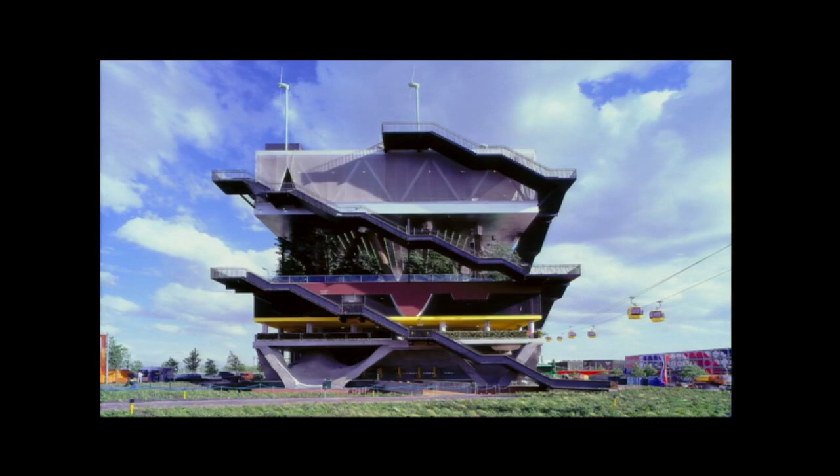So in a way, the dream for the future of how we could see it, not only in Holland, but also in other places, because you see urbanization everywhere. You cannot do something about it, that's there, it's an enormous force, but you can at least try to do it in a certain way that things become a bit better. I think that's the aim we strive for as an architect. It's not like we change the world, but at least you try to do things as good as possible, so that the situation or the general atmosphere in the city, the place you work, improves.

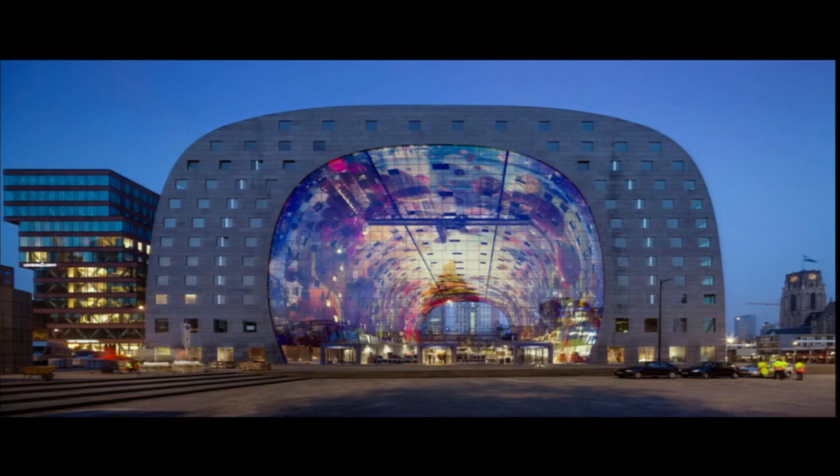Our office is very close to the market hall. After this building was finished, we really had a kind of boost of activity, not only in Holland but also certainly people discovered us. Before, we were considered more or less a boutique office, but after this building we reached a kind of next level.

The more commercial clients came to our door, which is an interesting situation, because how to do the same thing over again or not - this is what we are working on at the moment. So maybe in 5 years you have to ask me back, and I can show you what happened afterwards.

Rotterdam is not a typical Dutch city, it's a more modern city. There's a lot of towers, some old buildings, but the center is completely new, mostly from the 50s. Now more new buildings are coming in, creating a strange combination of architecture. What's nice is the very open atmosphere—people are used to accepting newness. They're ready for experiments and not too critical about keeping the existing, because the existing was already wiped out once, so this was in a way refreshing.

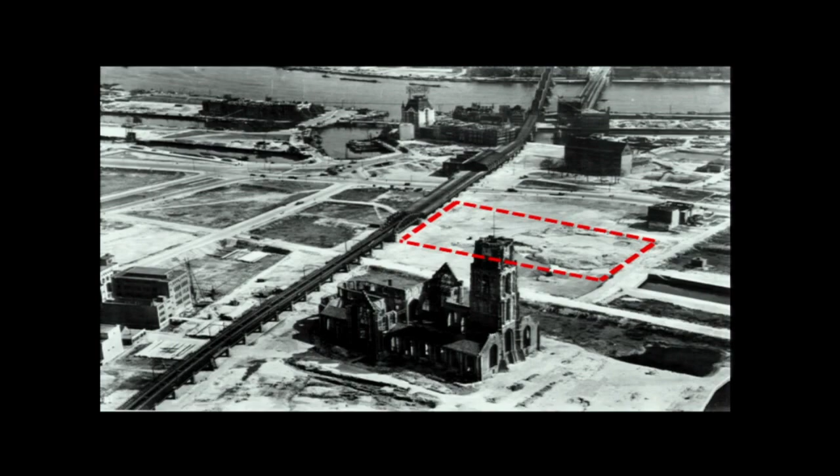This is the plot. The train is now underground, and there's an outdoor market on top of it, twice a week. The new market was supposed to bring more development into this part of the city—an idea from politicians: if we put an additional food market here open 7 days a week, and also add more apartments, this part of the city will benefit, because it had a lot of offices and was quite empty at night. So when we were asked to join this competition, it was a competition between developers.

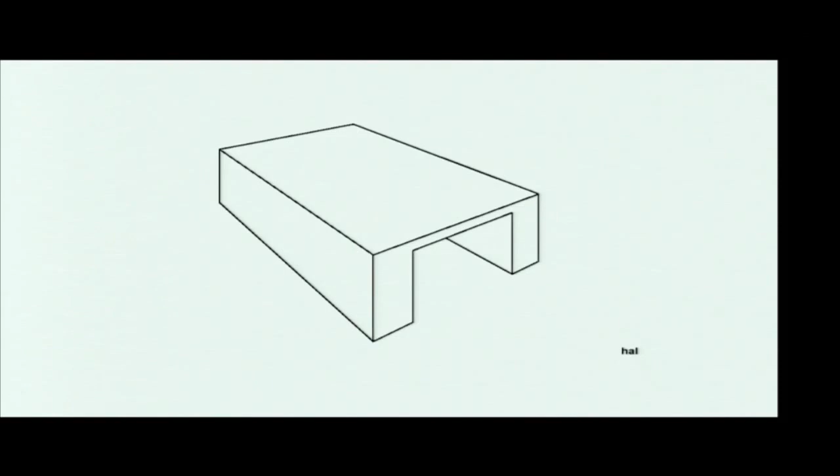We thought it was in a way a bit stupid to just make a slab with apartments and a market in between—that would be one solution. But hey, when we turn it around, we still have the same slab, but we get a huge inside space, and we can make additional square meters on top, which could become the penthouses. This would add extra value for the apartments and extra value for the market because it has more cubic meters.

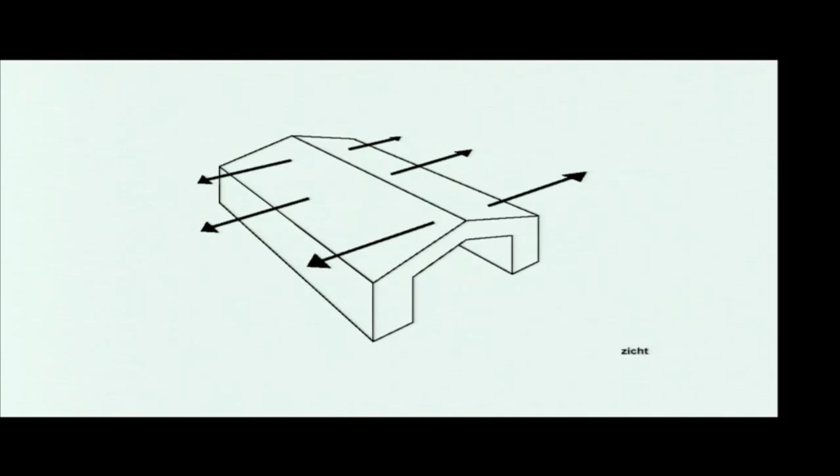Turning it into an arch, with more studies on lifts and everything, and this shape emerged as a horseshoe. It was a very simple, clear story, and everybody said, yeah, great, nice, let's do it—which is a bit of the attitude of Rotterdam. It's like, okay, we all agree it looks a bit strange, but we're going to make it.

It was also built in a straightforward way. In a way it's still a straight slab, except this one is slightly curved, with a bridge on top spanning between the slabs. So it's very simple in a certain way, except the scale is big. What was also very complicated was the underground part, because Holland is very wet, and the building underground is sort of pushing the water up—so it was a complicated situation to build the underground spaces.

When it was done, the inside became a complete magnet, because it was actually designed together with an artist. Everybody knew that when we had this space with the little stalls, this internal facade would be very, very important. But more about that later.

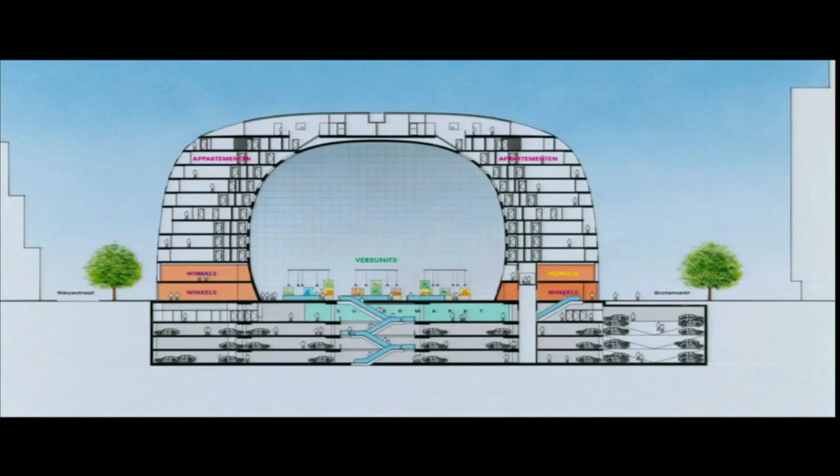The section of the building is like this—you see the ground level, here's a supermarket, the biggest parking in the city inside it, some shops and bars, and these are the apartments, more or less normal apartments. On the top floor you have the last lift stop, and you go in and have your own little patio on top and a large roof deck. That's one section, then it's stretched out to the side.

What we said in the beginning when working on the design was that making apartments on top of a market wouldn't be like a normal apartment—you have normal apartments everywhere. This would be a type that's not standard, maybe a few people in the city who would really like to live there, interested in food. They would be able to get fresh stuff from the market downstairs when cooking, and everybody would be very healthy and cook a lot. Unfortunately, we couldn't.

It's like an aquarium. So you have this additional room in your house, and you can look down into the busy life of the markets. And on the other side, you have a kind of regular balcony and a view to the city. So in a way they're one-sided to the apartments, but they're also two-sided. They have an additional quality on the inside.

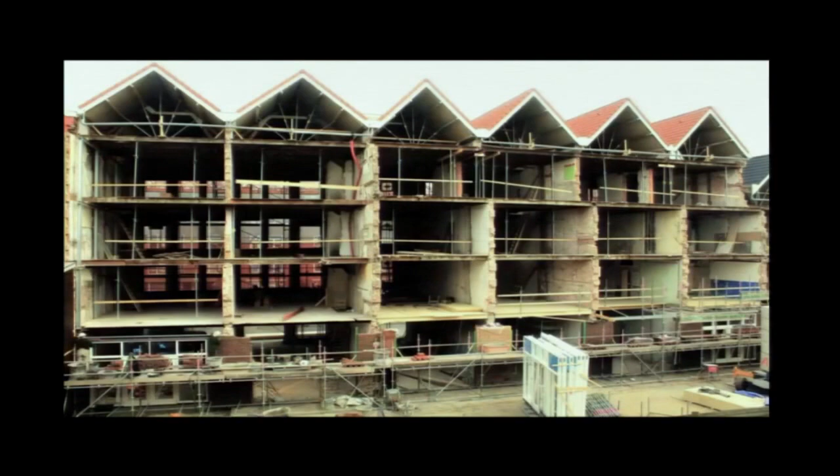A couple of years ago, they did an experiment where people could buy a big empty house, which they had to finish themselves for a small price, with the obligation to live there for at least 5 years. This was attractive for a certain type of people, who were able to buy a house for little money and then transform it to their own personal needs.

At the same time, the collective thing was that together they would do the new roofing and the better foundations. This was done by the general contractor. This type of development, called DIY housing - freely translated by me - is a very successful product.

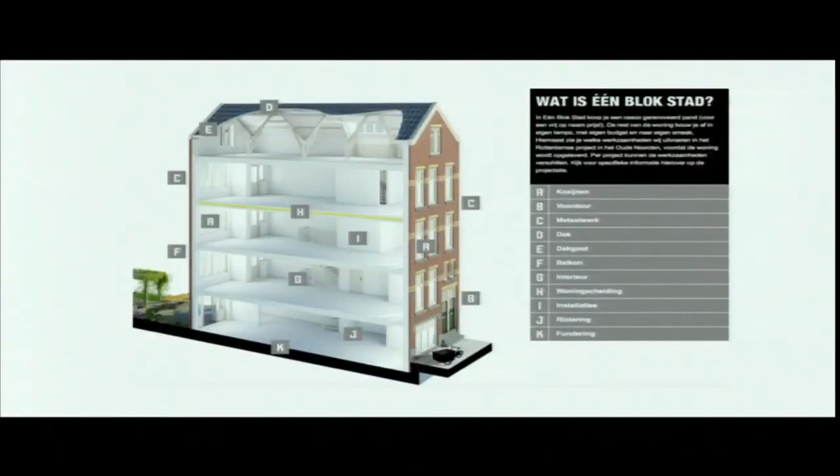It attracted young entrepreneurs and more creative families. They were able to stay in the cities, and blocks were transformed where the existing facade basically remained the same. Sometimes one family has a whole house, sometimes there are two - one has 2 floors, the other has 3 floors - and then there's a collective garden on the inside.

This, together with larger scale development, had a big impact on the social atmosphere of the city, and people felt more positive about their outdoor spaces and neighborhoods. Another favorite of mine is this park, which is on top of a shopping center.

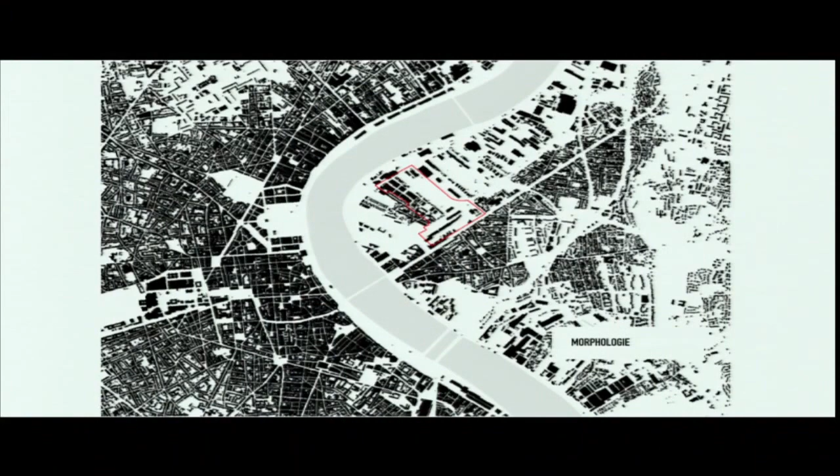I'd like to move from Rotterdam now to some of our projects where similar issues are happening. The first one is an urban design we're doing in Bordeaux, which, like I showed before in Rotterdam, is one of these mixed-use industrial wastelands on a good location. Bordeaux has a beautiful historical center, and right opposite this center is the city. You see this piece of land which used to be mixed use for the army and infrastructure, right opposite the historical center, offering great potential. So the city used to be like this.

You had the Rive Gauche and the Rive Droite, and this was the good side, and that was the bad side. The idea that the city planning office has now is to make this into a more coherent unity, so the two sides are better developed.

If you look at this idea, then this would be the ideal: the same as this one, but on the other side, with a mixed use of activities. There's all kinds of mix of housing, shops, cultural facilities, so that you really have one city. Of course, these days green is an essential issue, same as energy, and the zero energy principle. These are almost no-brainers, so to say.

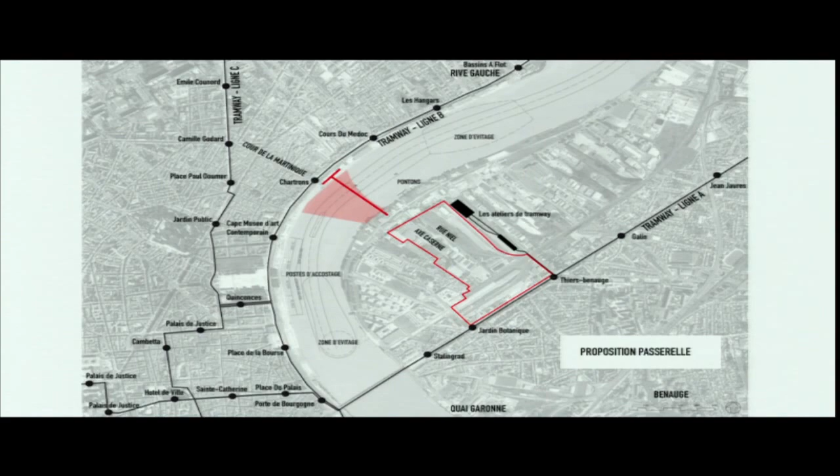So these were the starting points for the developments. There might be a new bridge here, and there's already infrastructure around it, so it's really a good place, so to say. Instead of expanding the city, going inside and intensifying the existing is the way forward.

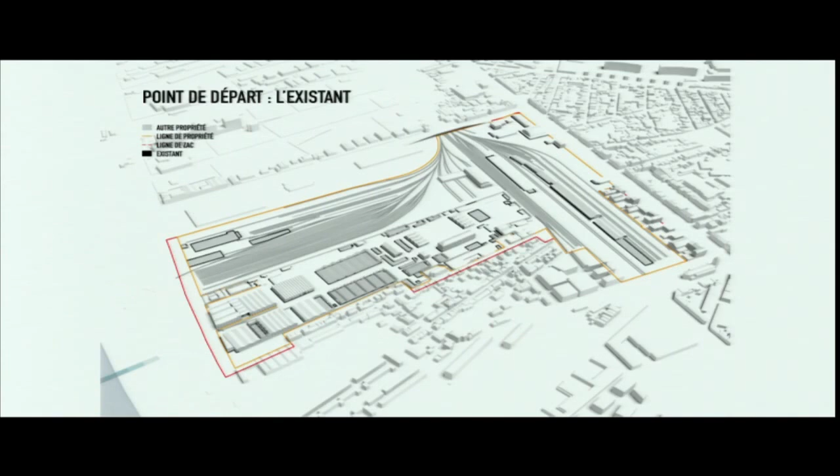What we took as a starting point was to try to keep as much as possible anything that was there, any pattern of the streets, any trace of the train. We thought, let's keep the character there, because when something is there and the presence of the past is somehow visible, it gives a flavor, a certain mood that you can never get when you make a new neighborhood.

So these were the lines and traces that we kept as a base for the design, and then we looked at where we could build. We could build in between these spaces, and you could basically extrude all the plots that we would have. Of course, this was way too many square meters, so we did a few operations to find out what the maximum envelope could be for the new development.

So it was an urban design. The first operation is: let's chop for the light. Let's chop on a 45-degree angle from the streets upwards. Depending on the width of the streets, you make an angle over the volume and slice it off, and this is what you get—a lot of chopped up roofs, you see.

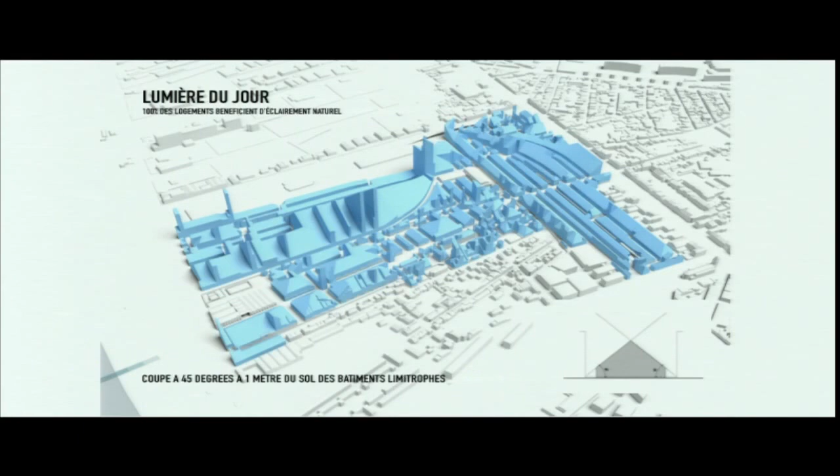Here you see this section, you're walking in the streets, this is the light angle, and on the other side the same thing. On the inside of the block, these are two little houses, and on the inside you can make a big house, so to say.

Then the element of light, of the sun. On certain parts you would like to have sun, and if it's too steep it doesn't really work, so you don't have enough sun. That means these houses would be asymmetrical, the envelope would be asymmetrical, etc.

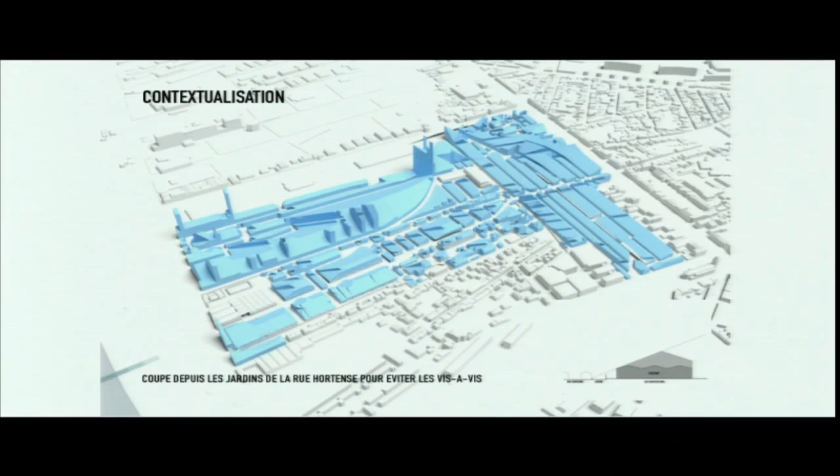So step by step, we got a certain amount of shapes, of volumetric elements that could turn into new developments and new buildings.

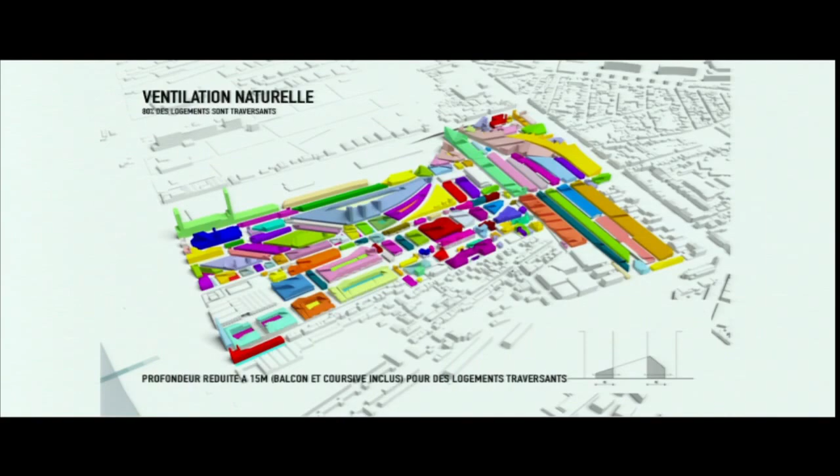Our idea was that this neighborhood was not going to be designed by MVRDV alone, but that we would be able to invite all our friends and some more as well—100 architects, every plot a different architect. There would be elements like ventilation and solar panels; these were all part of the game.

Same for the public spaces and the green. So this was basically the outline for the design, step by step, explained at different scales. We explained, for instance, here in a practical way: hey, you have this existing atmosphere, what do we like to keep?

This we keep, and then we start to extrude the plots, chop it off by the light, chop it off by the sun, add the colors, add pockets of space, add facades and green and solar energy.

So this is then the view you could imagine from the other side of the city, across the river, and the new skyline is in a way a projection from the pattern that's there in the existing area, but invisible at the moment. If you project it upwards with the principle I explained, the facade and the skyline become a very specific skyline defined by the patterns of the past in a way. So that was the principle.

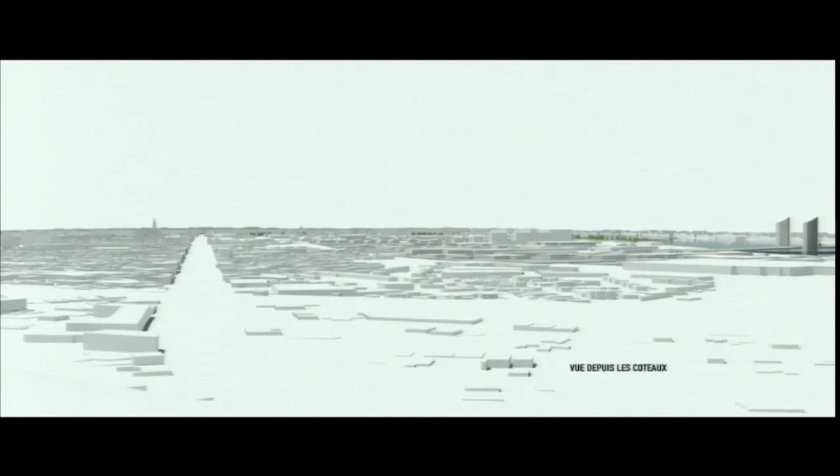Everybody liked it, and now we are developing it in the next step. I'll show you some more timelines in a way.

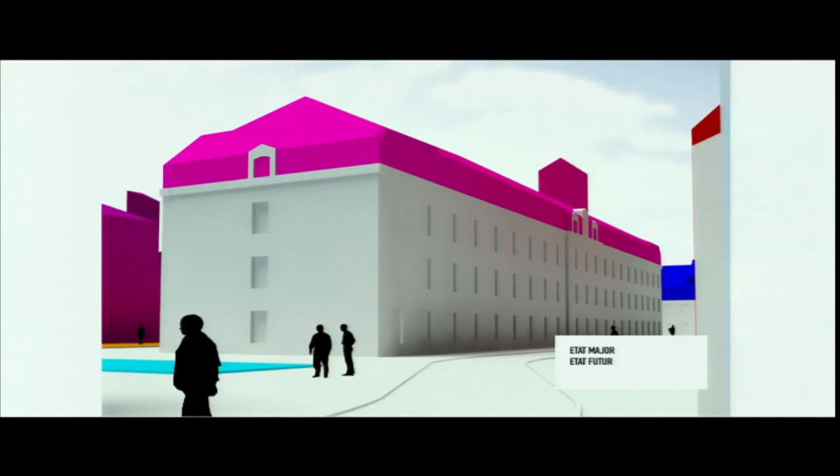By just keeping the facade, it will be a mix of old and new volumes. At the moment we're working on a first phase together with three other architects. We make the first block. This was a second competition right next to our plot, but we used the same principles and designed a series of buildings inside these envelopes.

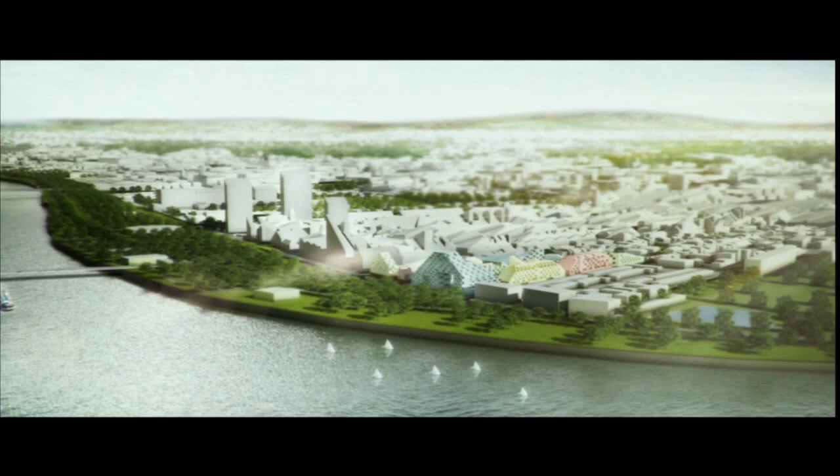It was in a way a test case for ourselves, to see if our own regulations would work. This is the main building that we designed, a series of apartment blocks in all kinds of different typologies, which went on sale last month. This is the model you see when you want to buy an apartment. This one is done by another architect, this one is done by us.

Next is another French project I'd like to show, because it's a building that is so ugly that we were almost doubting if we would do this project. Is this really worth it? But in the end it turned out to be a good exercise. It didn't really matter how ugly the building is — the more ugly, so to say, the more surprise you could create with it.

This is an old mustard factory in Dijon. The building is very new, only five years old when it was already abandoned. So it was structurally okay, but in a way also very depressing. There was, however, a guy who wanted to open a call center in this building because it was located in a good position next to the park and the station.

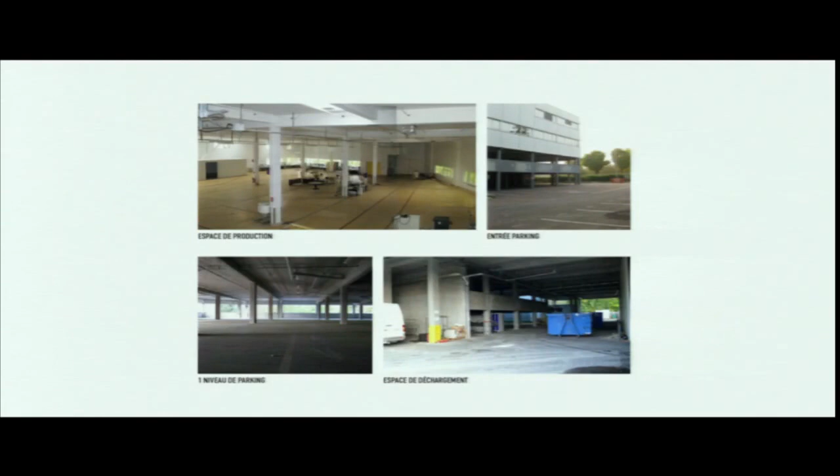On one condition, he said: okay, I would like to buy this building and develop it, but only when I can choose the architect. And his son had studied architecture and said, Dad, you have to call MVRDV. So this guy called us and asked if we wanted this building. That was such a good story that we said, let's do this, even though there was no money and hardly any time.

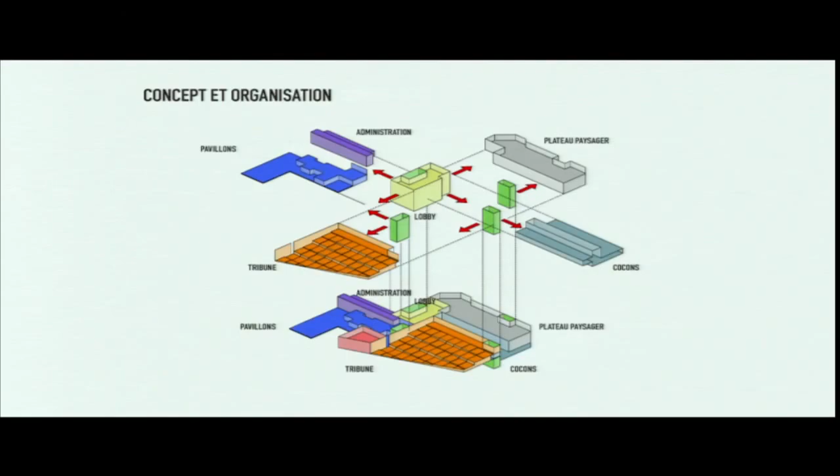So it was a quick study, turning this existing factory into a series of workspaces with different characters. One was a parking space that we turned into an office space. We took away some floors; some we just painted. Others already had an existing ceiling and carpet, and we just took out some panels. Here we did some painting on the walls. We added some small pavilions, and in the largest space we made a big stair and a new window on the outside wall with a view to the park.

So this is totally simple, but then the money was gone, basically — though we still really feel unhappy about the outside. This was the building, how it looked. We only had some money left to buy stickers, so with these stickers we could make a QR code, and the QR code was used by the company, the call center, for advertisements.

You could basically scan the building with your phone and it would take you to their website. It gave them a certain identity, and suddenly the building that was so boring became cool again, just by using a few stickers on the facade. Another lesson: it doesn't really matter how fancy the materials are — you could do this with super simple stuff and a good idea. The most ugly building can become cool.

So that was Dijon — these are a few quick examples. The great part about existing buildings is that it goes very fast. Normally an architectural project like the Markthal took more than ten years, and this was done in 1.5 years, from idea to finishing. A similar, similarly quick project was a building we did in Korea, in Seoul.

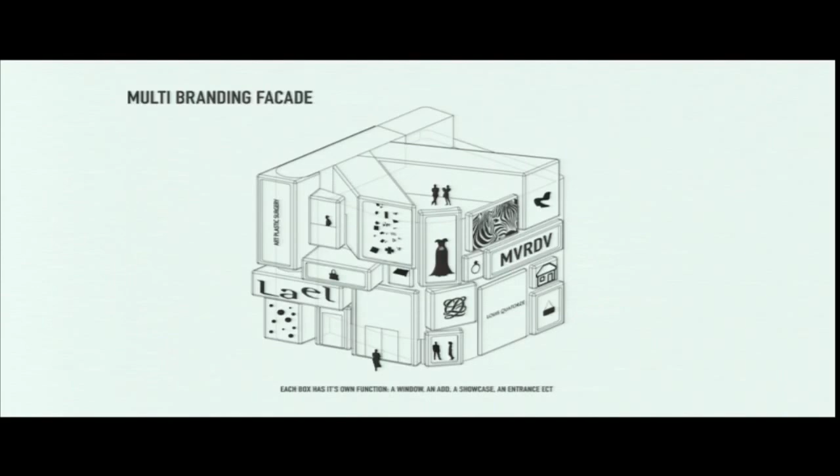Plastic surgery. So in a way we thought that the building was being treated like the people inside - they got a makeover, came out more beautiful than they went in. So we added a new facade with a lot of billboards, so that everybody renting a space could also rent a window, a new window on the outside. Instead of a one-tenant building like the neighbors, it was going to be a multi-tenant building.

So this was the idea: existing and new, dress up - like when you go to a plastic surgeon, you come out with a lot of bandages, and then you have to wait a few weeks, and then you're really beautiful. So this was what happened with the building.

Inside, you still see the old building shimmering through. We only took out the tiles, added steel frames, and clad it with new tile. We added a small pavilion on the roof, and in a small detail, a light fixture around every window which you could turn on at night depending on the mood - blue or this or that, everybody has a different color. That's the story of Gangnam.

One more, going back to Europe - one of the first buildings we transformed was two silos in Denmark, in Copenhagen on the harbor edge. The obvious thing to do was to fill floors inside the silo and make small holes in the facade. If you made big openings, the whole building would collapse, so you could only make small holes - and this was a pity because the views are really nice on that side of the river.

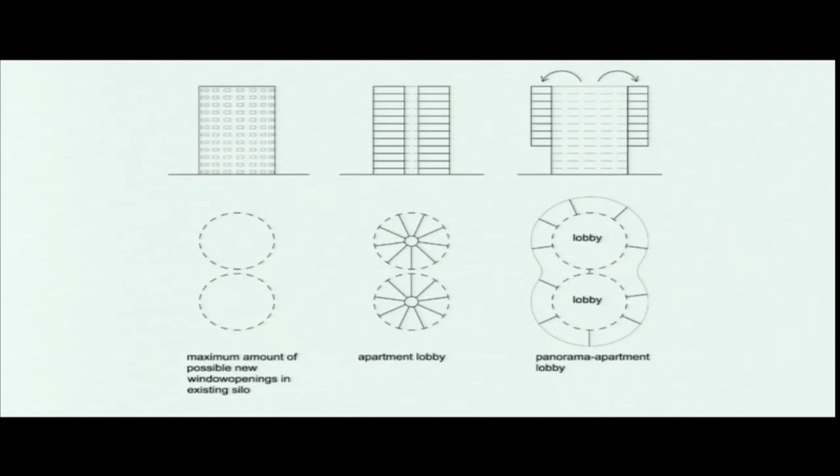So our proposal was to put these square meters on the outside - a bit more per floor, so we needed fewer floors. Every apartment would then have a fantastic panorama window. Everybody understood the principle when we showed the project, except that it was a bit more complicated to build.

The client realized that in the end it would be smart for him to develop it this way, because the square meter price of the finished result would be higher for apartments on the outside than on the inside. So he accepted that it was more complicated, with the bonus of selling it for a better price. Here you see some images of construction.

Big steel beams would cross the existing silo, and on top of them the columns and floors for the outside walls were made, tied back on the inside to the foundations. What was funny was that there was a maximum amount of square meters allowed for this plot. This was all made on the outside, so the inside was empty because it wasn't possible to add square meters there.

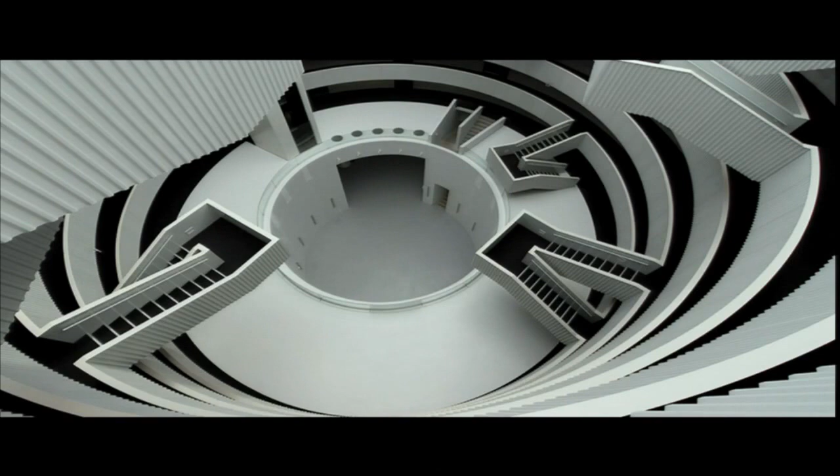We turned it into a gigantic lobby, a kind of architectural bonus space where you enter and have this fantastic collective space before going into your apartment. It's almost like a space odyssey space - everything we added was absorbing material, perforated metal, carpets, to keep the original walls visible on the inside. So inside you still see the concrete wall, and through the concrete wall you enter your apartment. From there, the bonus space is also a gigantic balcony with a full view of the city.

So that was our first Danish project, and after that a lot of Danish interns came to our office, and some of them were really good. One of them started an office in Denmark, and together we worked on a competition for the Rock Museum in Roskilde, Rock Magneten, which is kind of an old factory, a concrete factory that turned into a cultural center.

Roskilde is, maybe you know this, a kind of festival space. Every summer there's one of the biggest rock festivals in Europe taking place in Roskilde. It's already been there for more than 40 years. But the city is so known for that, everybody thinks Roskilde, oh yeah, I have the Roskilde festival.

They thought it would be interesting to have something you can visit throughout the whole year, not only for three weeks in the summer. This location of the factory was between the festival terrain and the center of the city, and it would be a perfect hub where all kinds of activities could take place — new institutions, but also student housing, schools, and a museum for rock, Danish rock music.

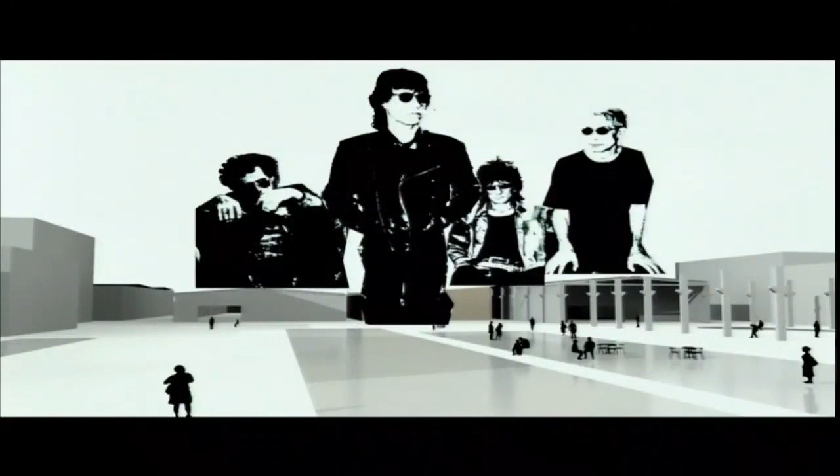There were supposed to be a certain amount of buildings, and we thought every building, every phase, would have its own identity. You could start with the lead singer, and the rock museum would then be, so to say, Mick Jagger, standing in front.

So I brought a small...

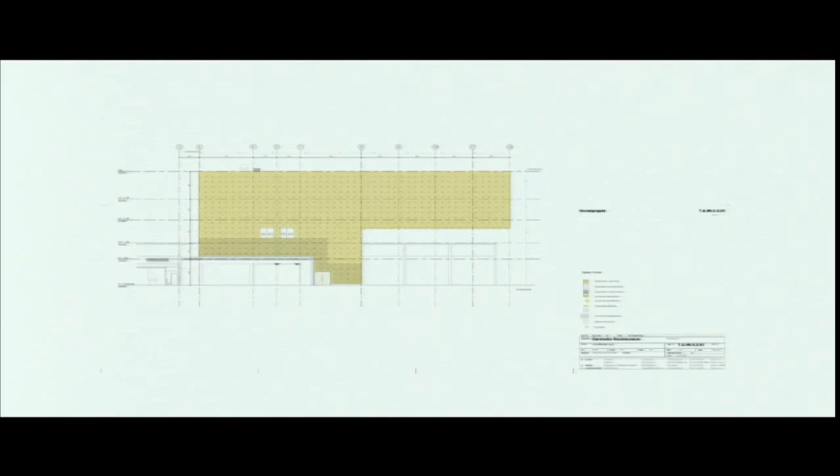This is the new building that we entered, with a big truss connected to a concrete base. The studs were translated into a series of aluminium panels. There were some windows where we added perforated elements that you can see from the inside out, but not from the outside in, while still keeping the overall cladding of the building.

The red carpet was made, and there's an informality that's quite interesting in this front space — it is kept. There will be containers, some stuff added, things coming and going. In the summer there are all kinds of lamps hanging and art installations depending on the situation. So that's the base. For the rest, these halls we kept almost as is, and only changed them on the inside.

This is what you see when you walk out at night, when the lights go on — effects you don't know about from the beginning, like the red carpet reflecting in the ceiling of the golden thing. Yeah, that's like, hey, wow — you only realize it when it's there.

At night, inside there's this red velvet feeling, where we wanted to make this instrumental box that you enter, a completely red velvet space. This was the interior design we made, and there was an issue with fire, of course, since we wanted this to be a soft material.

In the end, we found a special coating that made this look soft, but it's actually still an aluminum panel. Same for the existing hall, where we made the bar with a gigantic concrete counter. So this is a combination of the old and the new.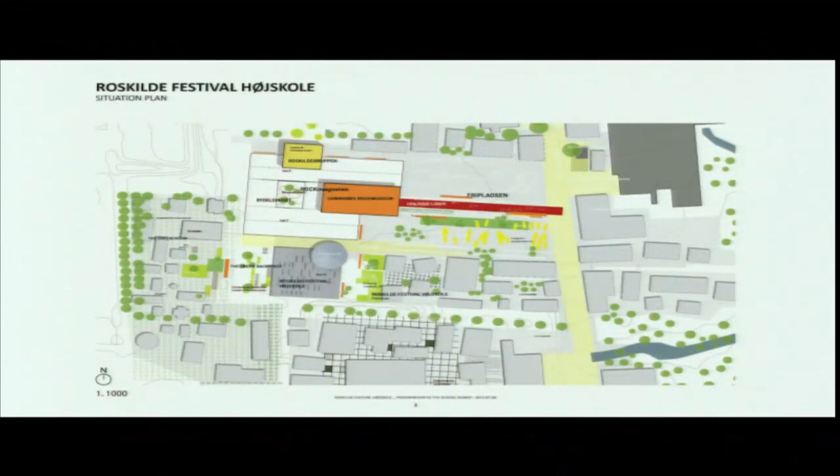At the moment we're working on a second phase, the building next door, which is going to be a school—kind of a high school, not exactly, but between high school and university. People can spend the summer or winter in Roskilde developing their talents, dealing with creatives, thinking, or making stuff. It's more for kids of 17, 18, between university and high school.

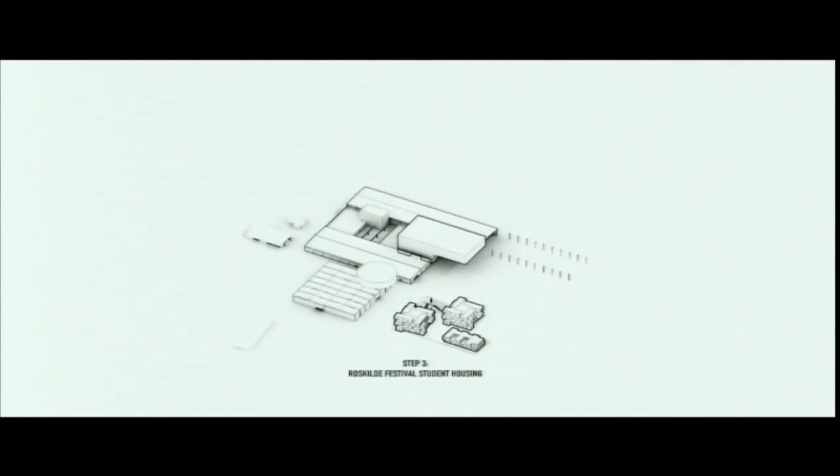This is the principle of the project: the museum is added, the school comes by, and at the moment we also designed a couple of student blocks—student housing for the students who will be in the school. They'll live in this housing next door, and these will be built at the same time.

Quickly an update on this school—it's really an interior project, basically. This is the existing hall and the program inside, so it's a series of boxes, so to say, inside a higher space.

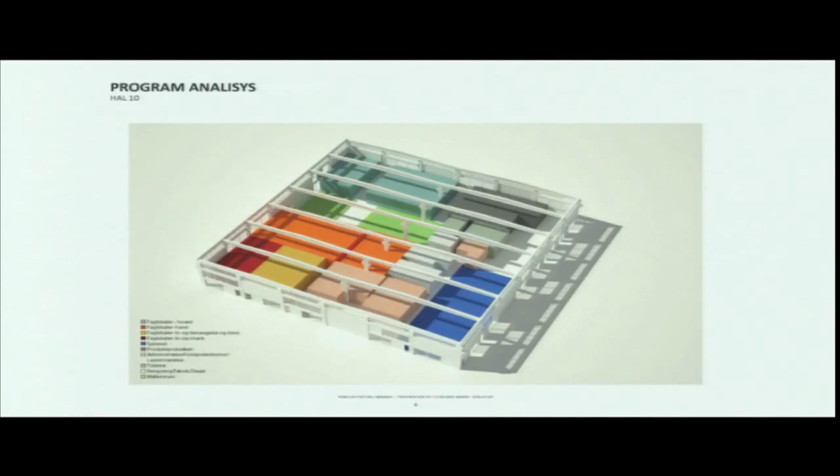That's the building—again, a very ugly building, but by simply adding, in this case, a small lecture space, and brushing off the basic qualities of this hall, we think it can become a really beautiful building.

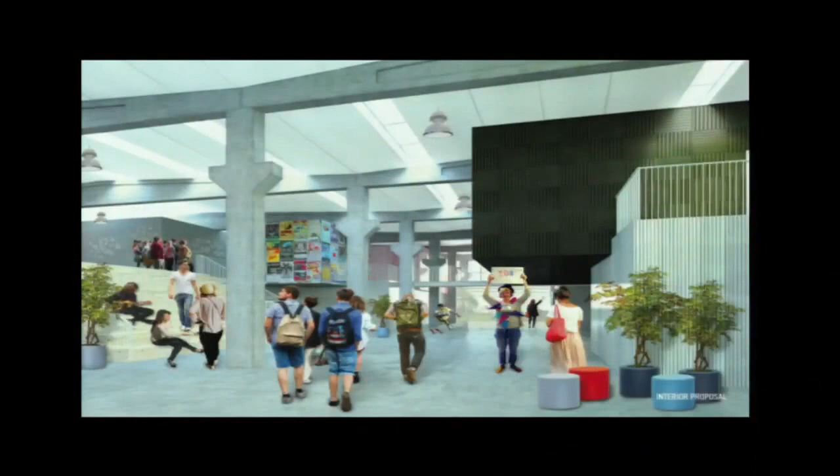Here you see the space inside, because these columns and beams were made in the same factory—this hall was basically produced in the factory next door. So this will still be there, still concrete, and we take away a few elements in the ceiling, add some boxes, and that's the story basically.

Some of these boxes are for working with the hands, others for working with the mind, and working with the body. Basically, this is the concept of the school.

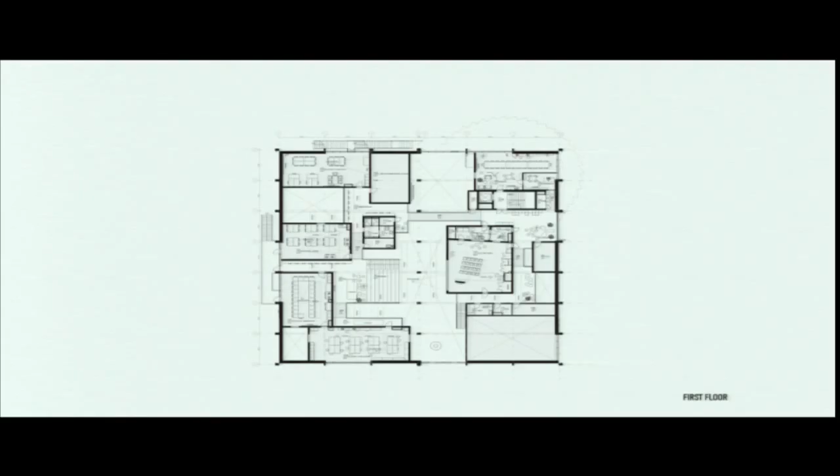So there are activities like dancing, music, creative arts, debate, philosophy, and leadership all taking place there. Then we set up a system to define the ideal solution for the interiors.

We didn't have that much money, so we developed a kind of data sheet for potential qualities of atmosphere of certain materials. Depending on that, we indicated a certain score on atmosphere—how it would be if it's permanent or if you could play with it, like graffiti or a poster wall.

What's the cost? What are the acoustical qualities, etc.? This was all done in a dialogue with the client, in countries like Denmark this kind of user discussion is a really important part of the design phase. So in an interactive design process we reached an agreement that this was the ideal solution, and hopefully next year we'll start construction.

It looks a bit like certain elements we use in our own office as well, so it's not that different from the space we like to work in. It's an existing hall, and then you add a mix of color and material and a certain atmosphere, which is a good base for all kinds of activities.

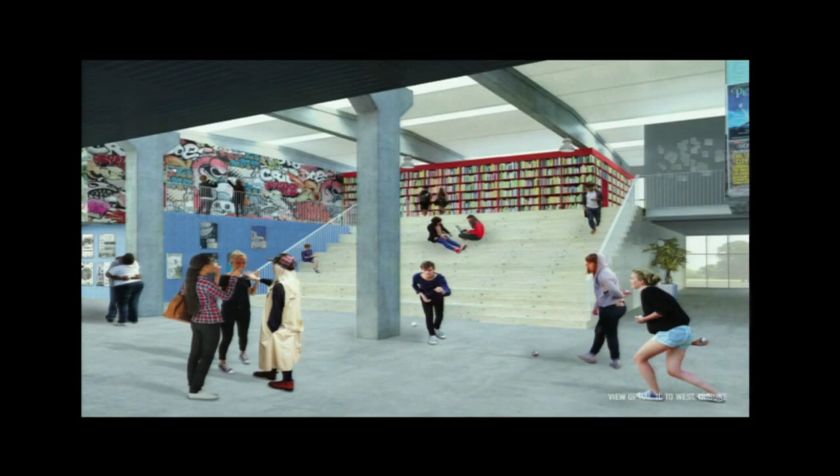Some images there, and one more for the road, so to say.

We moved to Asia, and this is quite an unknown, new project, also a transformation. Sometimes it's really nice to do this kind of modest project, simple in a way, buildings that aren't so fantastically dynamic, but this is quite a cool, typical Hong Kong warehouse.

It was bought by an investor who wants to make an office building out of it. We thought it was actually already quite beautiful as is, because you have this simple structure, and then you have this almost industrial feel to it.

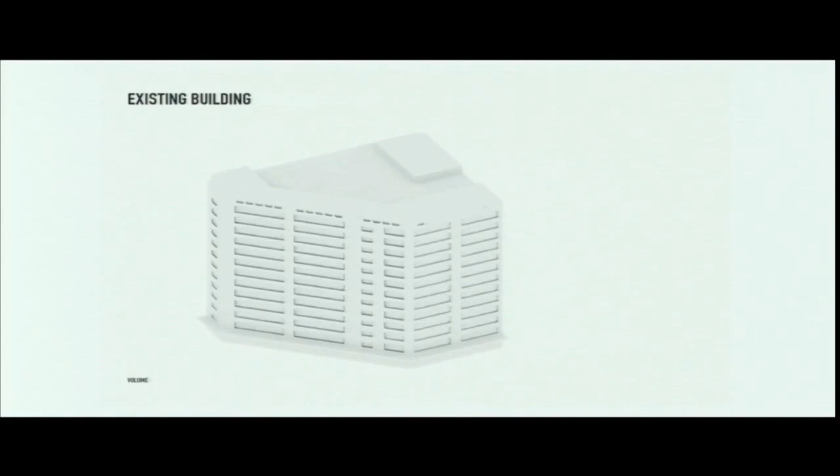Of course it's not handy as an office building, so we said let's just kick out everything that is not structural, so you have a kind of frame, a grid of floors and beams left, and that's the base for the new building.

Then we only add glass windows, also on the inside, so you really see the existing and the new as a contrast to each other. Everything concrete is existing, everything glass is new—clear.

So there's the result, and we added an outdoor space for every floor. It's a kind of lofty office space, and on every floor there's always the potential to step out and look over the city at night. These outdoor spaces give an extra quality.

We made one kind of showroom floor to test the effect of a completely glass office. This is a tenant option—if you rent floors in this building, you can choose if you like it like this, or you could actually get it with glass floors and glass facades, everything glass. That's the difference.

In a way this is one of our topics, a kind of fascination in the office. It's not only color—we also like to deal with the development of new materials, especially glass. We have a couple of buildings made where every time a new invention was made, in a way.

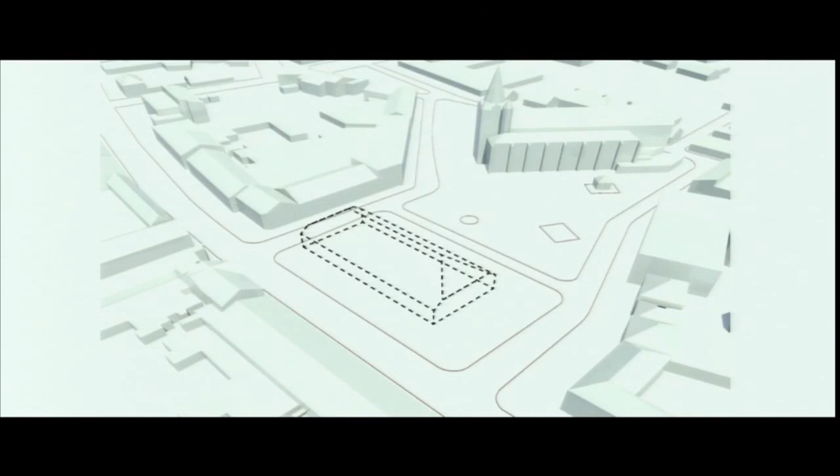After several earlier attempts, an urbanist was hired who was very successful in making a solution—the building envelope that was going to be the base for a new building. We got back into the picture because we'd been involved in this project for a while, but it was never really developing further. At a certain moment it was clear: guys, we have a solution, this is going to be it.

This is the outline of the building, if you can make something inside this volume. Looking at this volume, it was almost too obvious to say, hey guys, if this is what you decided on, what you would really like is this - it has the shape of a typical farm from the village. So the average conclusion was, let's make a farm.

So we said, let's do it then. Let's make a farm together. So the thing is, which farm? It became a nice research project together with the architectural history department of the Eindhoven school.

An inventory was made of all the farms of the village, and they were indeed pretty much the same, but slightly different as well. A database was made to map all of them - how long are they, where are the doors, how many chimneys, what are the proportions, on which side is the entrance, etc. We put all this information in and tried to develop the average out of it, to make one farm that is kind of the average of all the farms in the village.

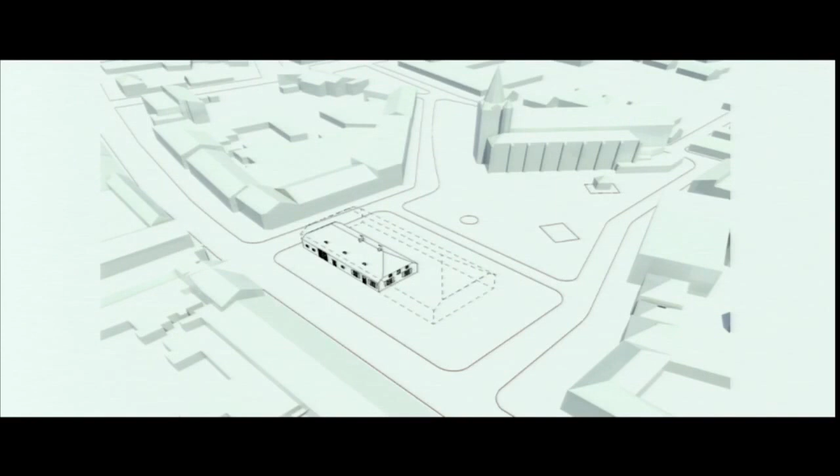So what to do? Luckily it was a digital file, so we could introduce scale. We stretched the farm to the right proportion, 1.65 times bigger. And then it became a fantastic solution to say, look, we don't have to make this really out of brick - we can make it like a Photoshop building. There was a new technology where you could print on glass, and this more or less happened at the same time we were working on this building.

After some research, it became possible that we could use this product. And then the architecture of the building became really a digital project, where we could erase some of the facades where we wanted to have a view, because the building was scaled 1.65 - but the people are not scaled 1.65, so if you stood in front of the window it would be much too high.

So the client, who was a commercial developer, wanted some shops and little bars. He said, look, I need a shop window, please make a window. So we just erased some of the pattern and gave him a shop window, but kept everything else.

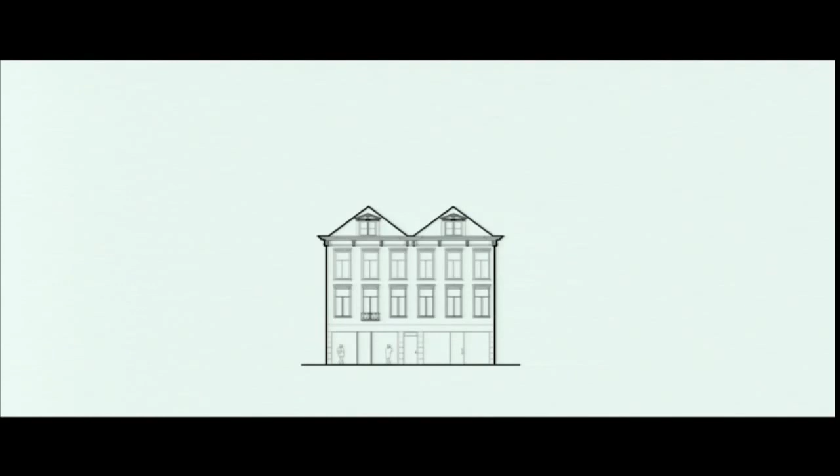This is the original design of the house that was there when it was built. Then the fashion shops came and they chopped off the ground level, and this was more or less empty. The building had potential to add some extra square meters, as long as you kept some sort of traditional outline, a permit was allowed.

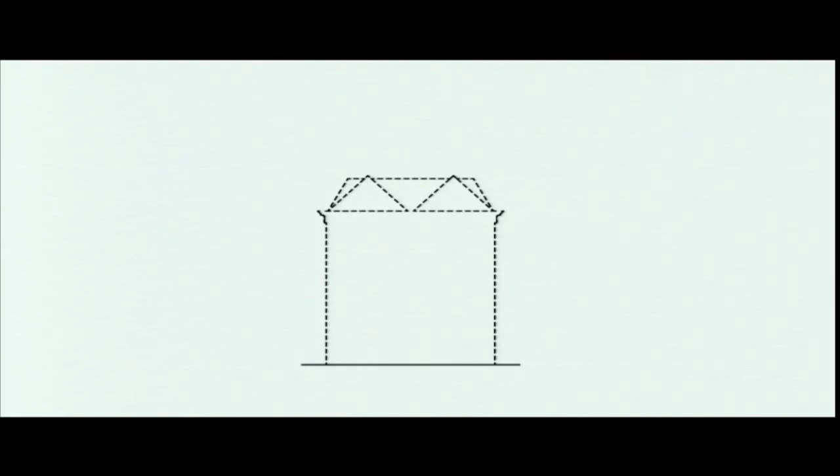This is then the existing house, and what we said was, okay, why don't you just, instead of designing it new, take the old design and then stretch it out again, make it fit to the new building envelope. So we took the old drawings from the archive from the city. This is the original design from 1874, and two of these houses were bought by our client.

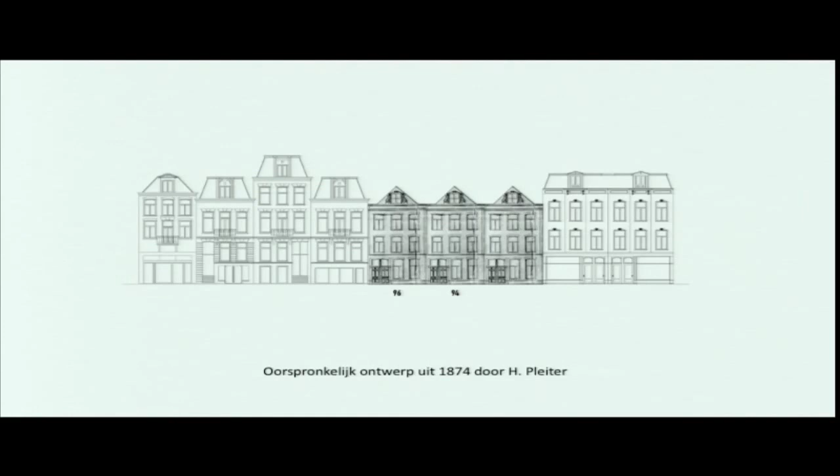So then we said, okay, why don't we do it like this? Keep the old design, copy it, but where's the shop? You have to make it out of glass. If you have your traditional design, you keep that design, but make it completely transparent. You have a fantastic shop, and at night it will be the bomb, the best building on the street.

There was a bit of discussion about it, because how is that technically and aesthetically working? The city said, okay, traditional is like this, and a completely glass building won't fly, so to say. We have apartments over there, and energy-wise it's going to be a nightmare. This is not going to work. So we had to make a new deal out of it.

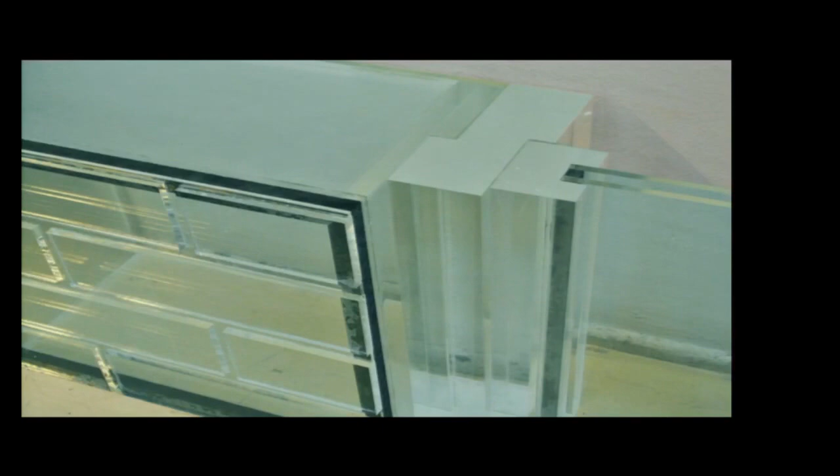Maybe we were ignorant because we didn't really know if it would work. But we just said, okay, if it doesn't work, we could do it like plexiglass, and this was the first test. And then we could make the rest also out of glass and make the windows out of plexiglass. And then we discovered this Italian brick, this piece of glass from Murano, which was insanely beautiful.

And when we had ordered a few of them, the effect was so amazing. They said, oh, this we have to test if this works. So can't we make the whole building using glass bricks from Italy?

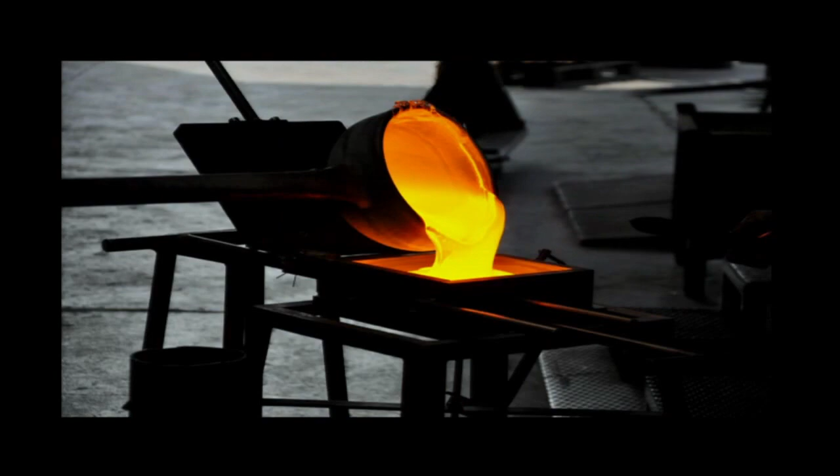The guys from Murano said, well, yeah, we cannot only make bricks, we can also help you with the other parts. So the glass window frames out of plexiglass, we can also make them out of glass, no problem. So step by step, everybody got more and more excited.

There was, of course, an issue of money, but when it's very beautiful, it helps, so to say. So our client got more and more excited, his business partner more and more worried. But in the end, the ultimate solution was like, okay, this is not architecture anymore, it's art. And then everybody said, yeah, it's actually not so expensive anymore. So it's a good advice: if you're over budget, say it's art.

Now, in the meantime, in Italy, they did a fantastic job. Basically, every piece of the building was made into glass. There were different sizes of bricks, different decorative elements. The only main issue was how does it stick together?

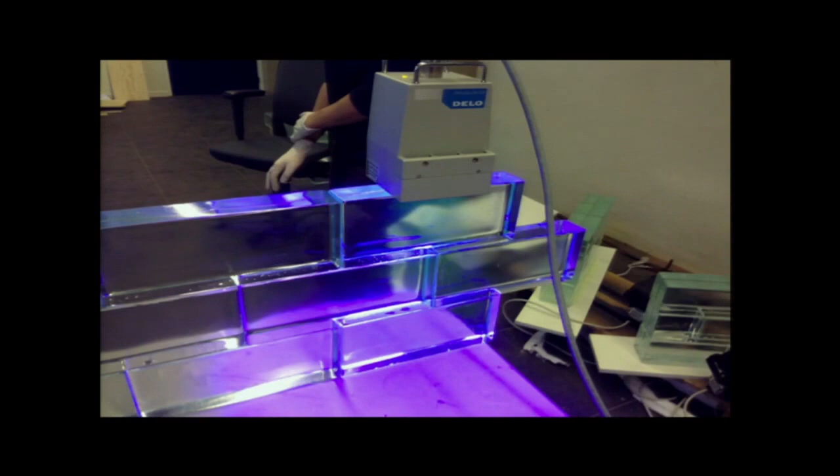Because you can put them on top of each other, but then it starts to slide. The glass element in itself is very strong, but if you put them together, the weak spot is obviously in the glue. So together with the university in Delft, research was done on how can you -- there's all kind of fantastic glues already made, and you have to think about the dentist, for instance, you get this kind of blue light sometimes, and within 2 seconds it's done, it's dried and it's really strong.

So this same two components with UV lights, all kind of new materials that are extremely super strength. So together with the Department of Materials in the university, we made a test of the bricks, glued them together, and like magic, it would hold. This is quite heavy, and the glue kept everything together.

A more complicated element, like the architrave over the windows, was all built in pieces in Italy, came over with a truck, and then it puzzled together in Amsterdam. And we first did a test in the university again, how strong this would be, because on top of this there would be this heavy amount of glass bricks. And let's see if this would, oh, sorry.

Oh yeah, okay, click. So this is a kind of structural movie made by the people in Delft.

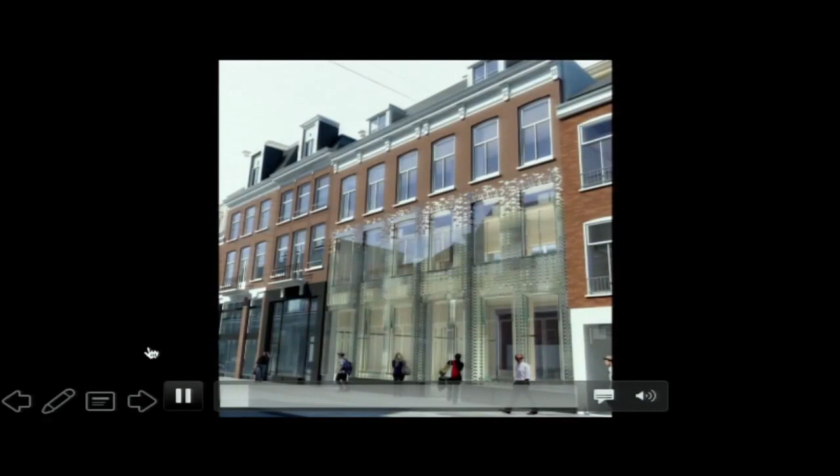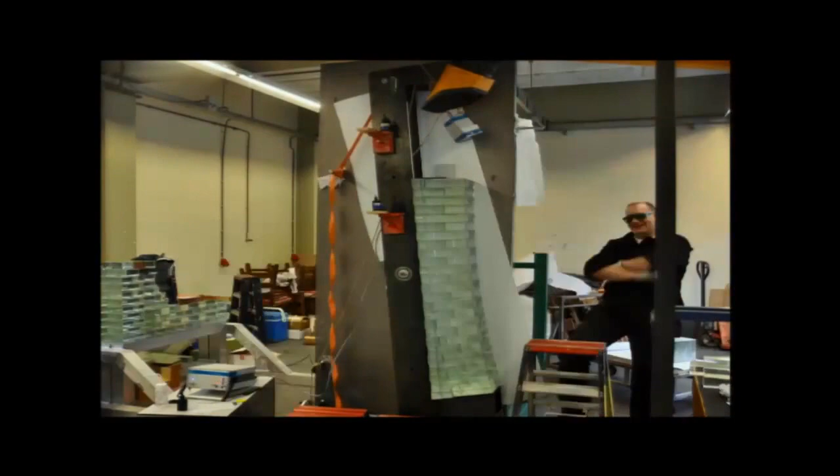They were testing the strength of one of the architraves. The complication was that it had to be built horizontally, so every brick had to be glued horizontally. So they made a device that would rotate, and every time they would use the UV lights, glue, switch it again, glue. You can see that every time the glue was applied, it had to be horizontal.

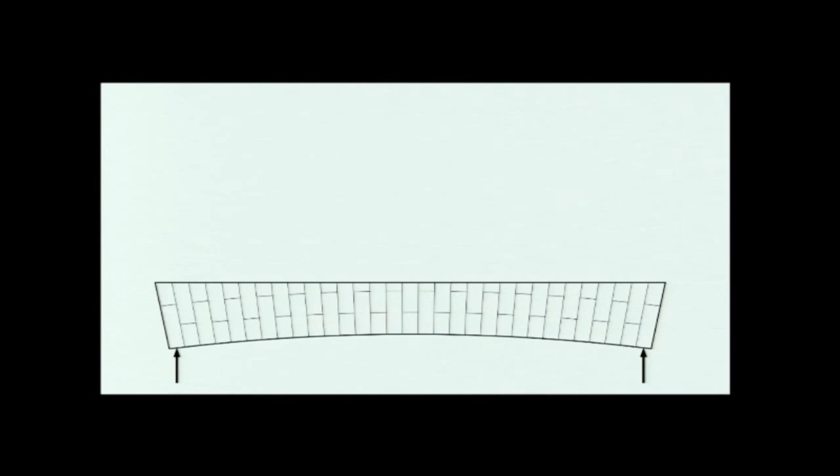Hoist it up, and then put it onto points, and then put the pressure on. Measure how much strength it could hold before it would break.

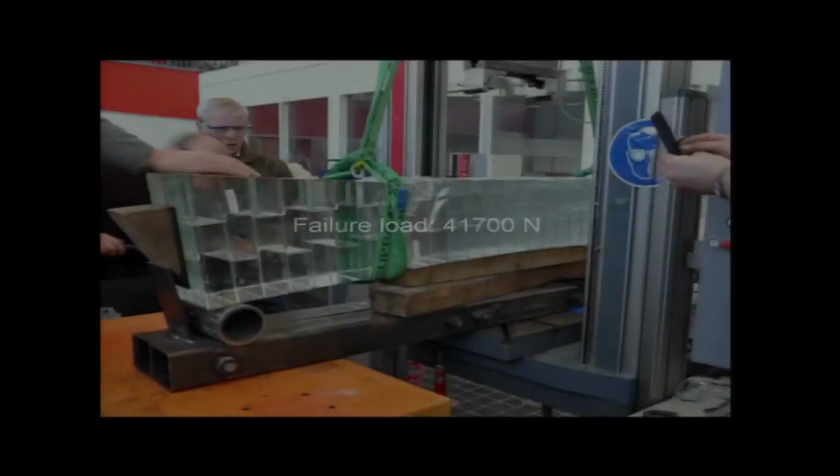Well, the good result was that it was more than enough to support the layers of glass on top of it. Of course, this was a crucial element for getting the building permit, because it's nice to make this idea.

Then there was actually a lot more work in the technical development. Because the drawing itself was already there, they just extruded it, we just changed the color, and then these kinds of elements would support this part, plus there was actually a steel element in between, so the brick was supported by a steel beam hidden in here, but all this part had to be supported over there and over there.

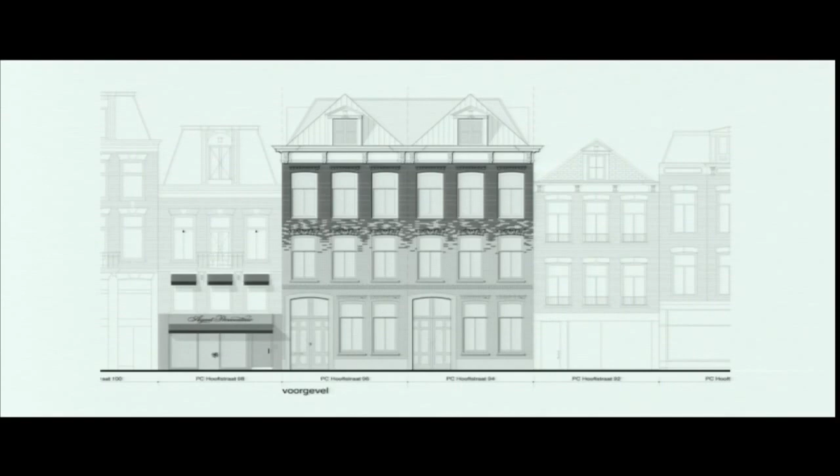So in the meantime, the building was gone. That was not so much of a problem. They started to build the housing on top.

And in the meantime, the glass bit, we didn't have it, it took a bit longer, so to say. So this was empty for a while, and then the glass came, and the guys from the material department said, yes, you can build here, but you have to seal it off, so there should not become any dust in the glass, between the glue, of course, because that would not be good for the strength of the building.

Our client liked it actually a lot, because then he could seal off the whole construction site. Nobody could see anything that was happening. So this was there, and we had special permits, cost some parking spots, whatever. So for a long time, this big block was standing in the most expensive shopping street in Holland.

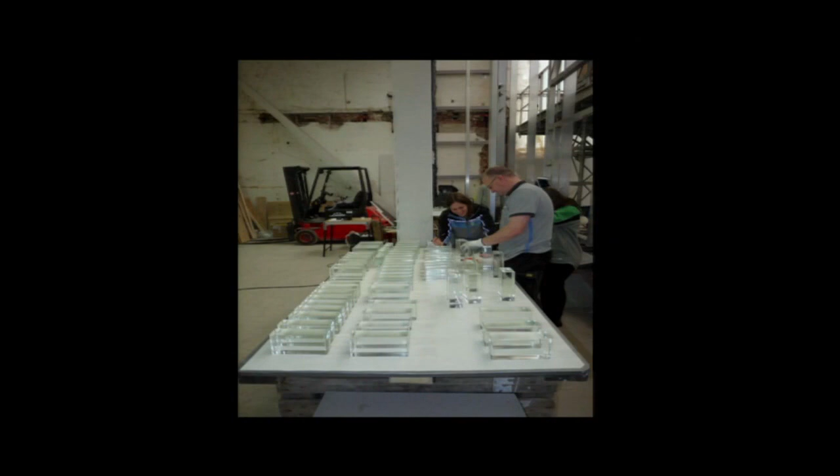And inside, magic was done. There were kind of construction workers, there were PhD students who were studying on this, doing their PhD on this project. And they got training on the construction site on how to glue the bricks in such a way that it was strong enough.

So in a way, it was not a construction site anymore. It was almost like a laboratory condition. Normally you have a kind of rough concrete, brick, mortar, and loud music. And this construction site was a bit different.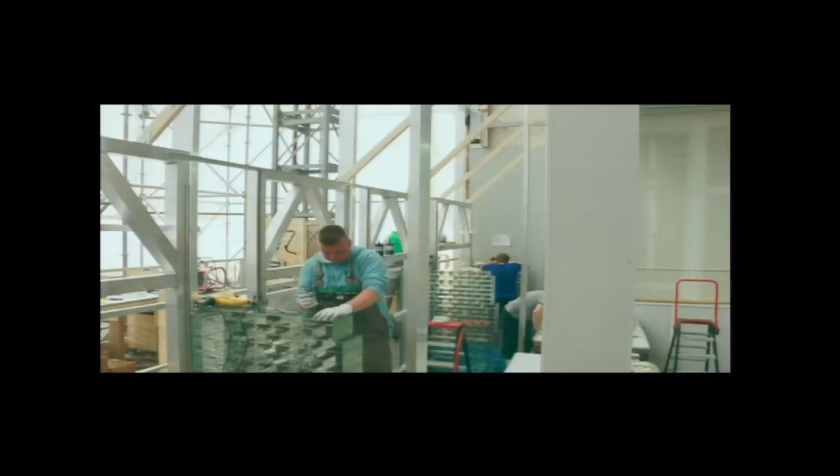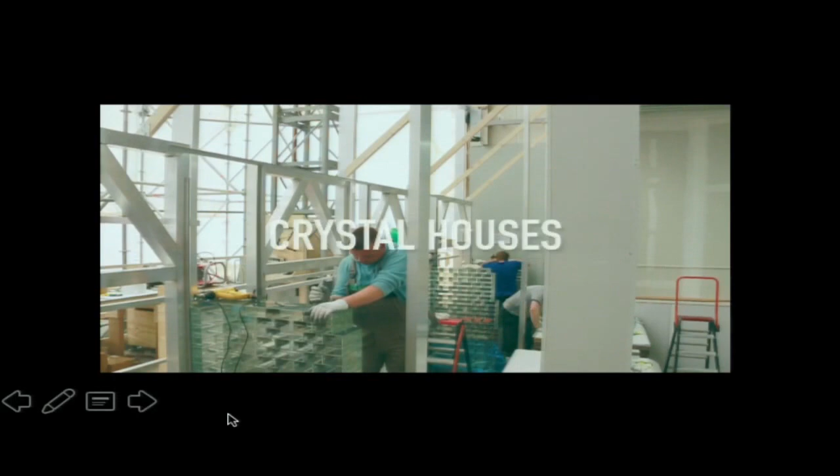And to give you a bit of a feel on what it was like, we made a small movie to honor the guys making this building. That's a bit of a Zen moment. Take it.

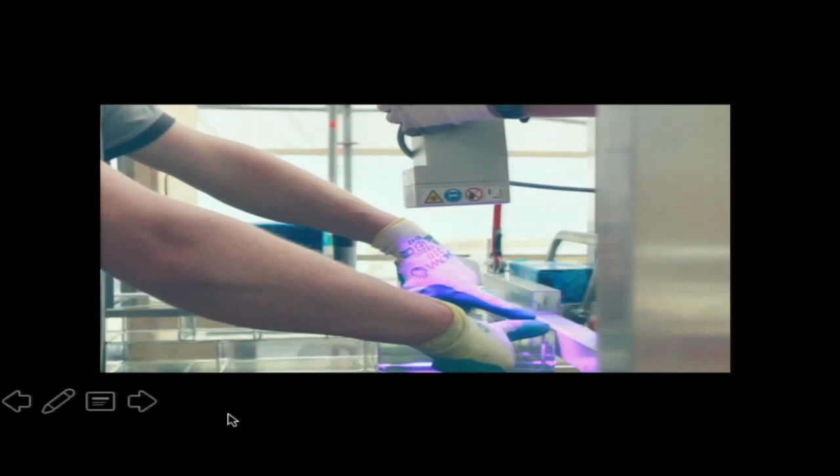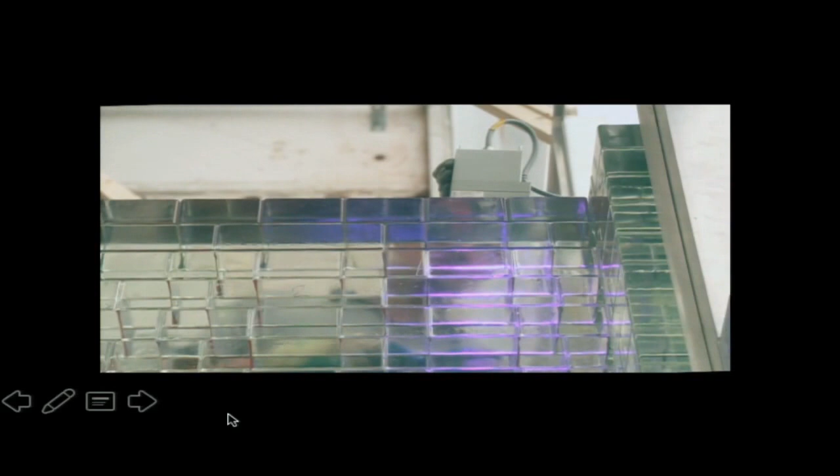So basically one guy was doing about 1 square meter per day. And every brick, to give you an impression, is around €50. So you can do the math. You see there he's working with a blow dryer.

Okay, but then anyway, to give you a feeling that it went super slow, but super beautiful as well.

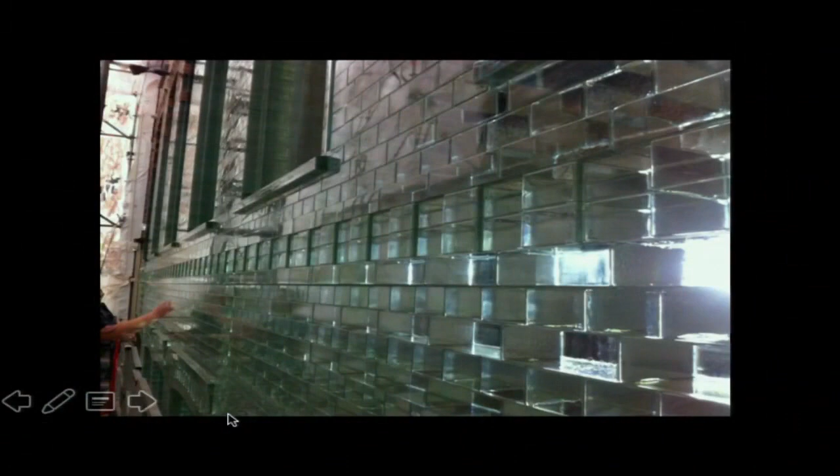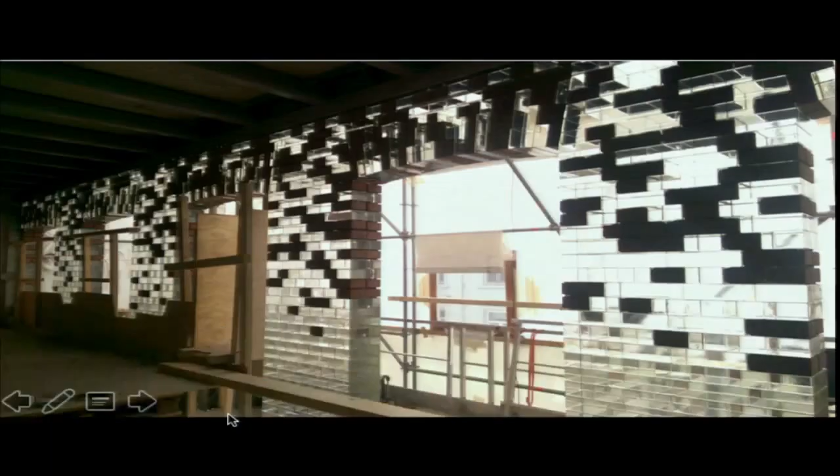So here you see then behind the screen, everybody was getting totally excited, and the difficult part was of course the transition between the brick and the glass and the brick. So actually these are thin strips of brick glued on the glass. So the glass is actually behind the brick, and here it's pure brick. You see a small difference, but this is another issue that had to be solved from the inside and from below, and then it went out, and there it was.

Chanel was actually in there temporarily. The owner of this building also owns a new building where Chanel will be located in the future.

Everybody thinks this building was built for Chanel, but it's actually not. It's a pity because they didn't want to invest in an escalator. So the first floor, which is also completely transparent, is boxed off by a big alcove, which is a bit of a pity, and then they put these flowers on. It will probably be even more beautiful when Chanel moves out.

The building is there, and it's causing quite a stir in the city because it looks quite normal on one hand, like a normal fashion shop. But when people pass by, they really realize it's not exactly what they think it is. This is what it looks like, and when you come there, you always see people touching it. It has a kind of ice quality, it looks like ice.

One more, and that's the last one—probably you've heard about it as well. It's the first round project for San Pellegrino. We've been working on this during the summer with four teams, and it's already shown on the website of San Pellegrino. Now we're together with BIG.

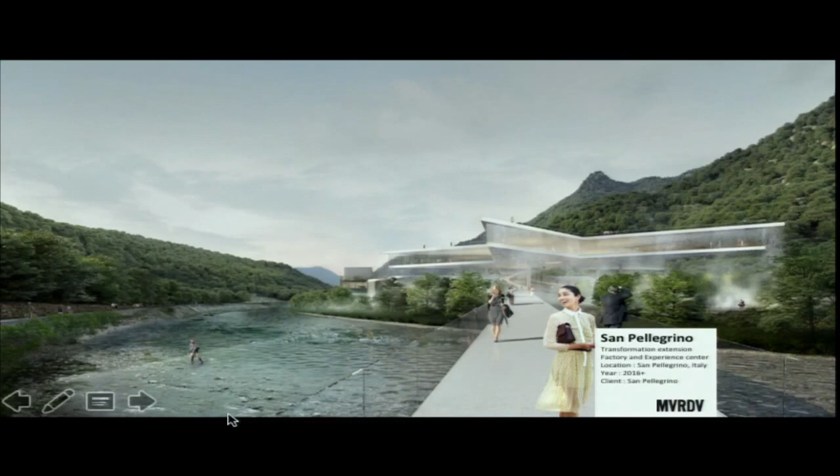We have to compete for the final ticket, so to say. It's the transformation of the factory and an extension of the San Pellegrino factory itself, which is located here. You see that in the village where it is, in the mountains, it is really an enormous element.

I never really realized, but it's quite normal that all the water from San Pellegrino actually comes from here. It's not like a Coca-Cola thing where you have different factories on different continents—everything comes from here. So the factory is, in a way, the ultimate machine where all the water is gathered. It looks a bit run down, and that's why this project was started.

There's a connection over the river, to an extension of the factory, which has this kind of industrial quality that we thought was actually quite beautiful in the landscape up there in the north. Instead of making something radically new, it was more interesting for us to make a small part new—the visitor center, experience center—which was supposed to be connected to the factory, minimizing the additional square meters needed.

So we said, okay, let's keep the factory and make it even more beautiful again in its old state, by taking away all the shitty stuff and changing the facade again—a bit like we did for the Hong Kong building.

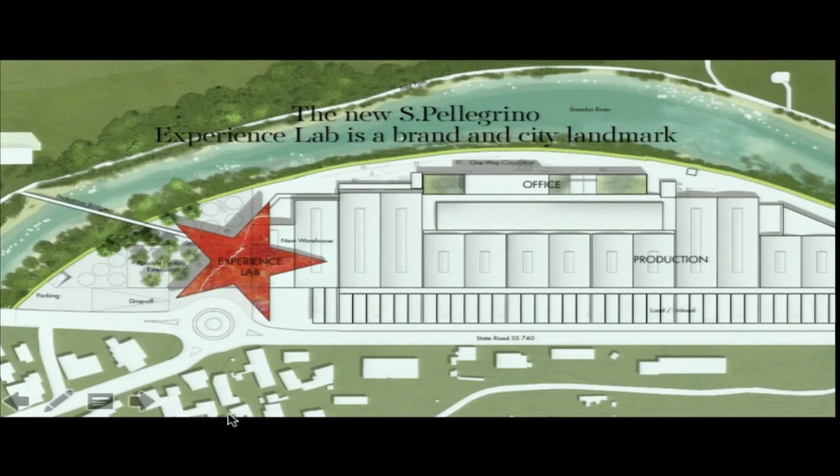The experience center, the visitor center, is in the shape of the star, which is on every bottle of the San Pellegrino brand. So in a way, you can say that the factory becomes the bottle. The factory is where the water comes from, the star is the brand, and the additional experience center is then in the shape of the star.

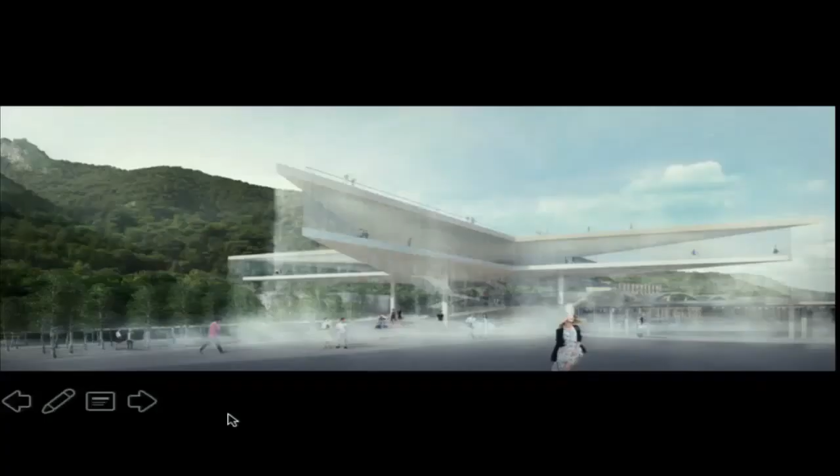That was the simple story, and I think they liked the simplicity of it. Now we're developing it into a more real project that we have to hand in within a few weeks. So keep your eyes open, and we hope to know more. Here's some images from the first round of the competition. Thank you very much.